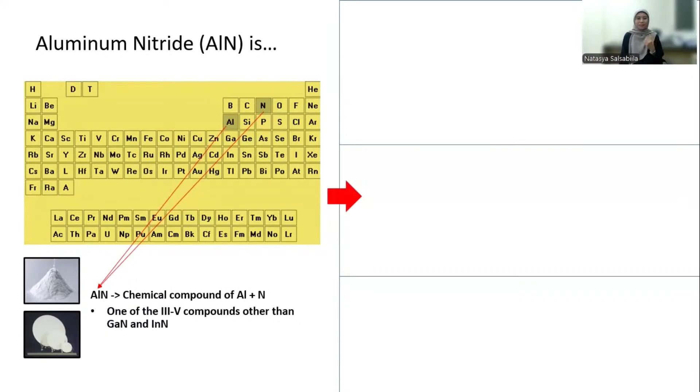You can see several real-world applications of this semiconductor material, such as in the high-frequency domain, in high-power systems, and most importantly, AlN can be found in devices which combine both high-frequency and high-power capabilities in one device. For that purpose, mostly AlN is produced on silicon wafers. Sounds very wonderful, right?

Now, let's talk about the current concern regarding AlN on silicon wafers. If we look at the current market, most companies such as Kyma Technologies, Enkris Semiconductor, Mitsubishi Chemical, Dowa, and others, they are still focusing on 2 until 6-inch wafer.

So there is a clear demand and opportunity to shift towards 8-inch wafer production, which supports next generation devices through lower costs, higher yields, and of course, contributes to industrial scale production. Because when we increase the wafer diameter, we can fabricate 25 to 40% more chips per wafer.

But it's not as easy as it sounds. Scaling up the wafer size introduces a major hidden challenge: achieving film uniformity across the large surface area so that the entire wafer can be utilized efficiently without material waste.

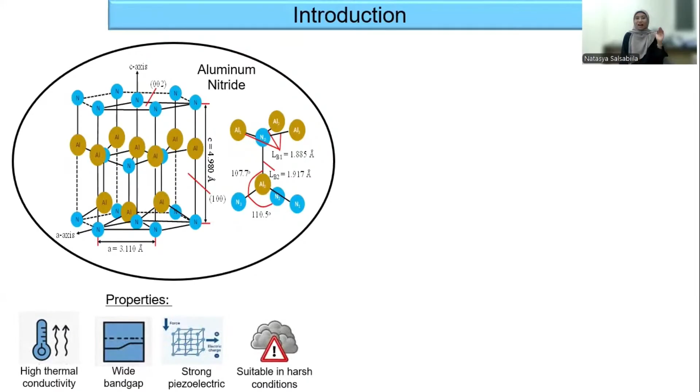So, what makes AlN sound very interesting? AlN has excellent properties, such as high thermal conductivity of around 320 watts per meter Kelvin, a wide bandgap of 6.2 electron volts, strong piezoelectric response, and excellent chemical and thermal stability.

Several methods can be used to synthesize or fabricate AlN, such as metal organic chemical vapor deposition or MOCVD. Then we have atomic layer deposition, or ALD. The next one is molecular beam epitaxy, or MBE, and the last one is pulse laser deposition, or PLD.

However, these methods are typically expensive, complex, and more suitable for small wafer sizes only. This is where magnetron sputtering comes in. This method offers a solution by providing better control and higher deposition rates.

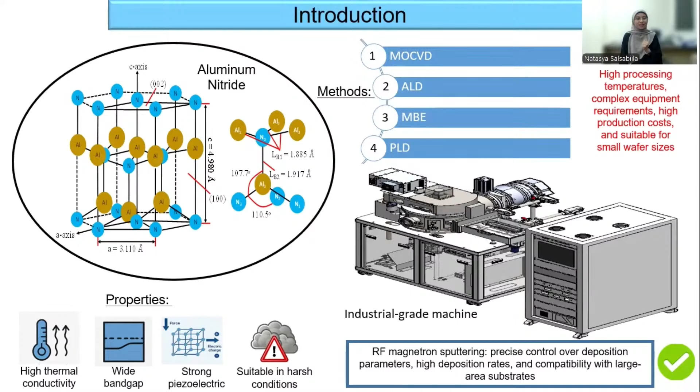However, most sputtering systems use only 3-inch targets, and the use of larger 12-inch systems is still very limited. So, in this lecture, I try to explore the AlN film growth using the 12-inch system, or industrial-grade machine, that supports large wafer size fabrication.

Then, how can we make sure that our AlN film has high uniformity? The answer is in the rotation speed setting that we use. This parameter sounds underrated, but believe me, this parameter is very strong in influencing the uniformity across the 8-inch wafer.

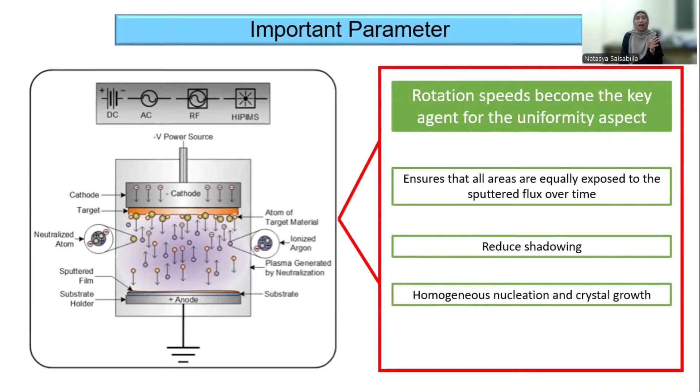This parameter can ensure that all of the wafer surface is equally exposed by the target and make the film have homogeneous nucleation and crystal growth.

For your additional information, this chamber is in vacuum condition with a pressure of 1 times 10 to the minus 7 torr. You can imagine that even a fly and an ant can die in this environment, because our normal atmospheric pressure is 760 torr, not even minus.

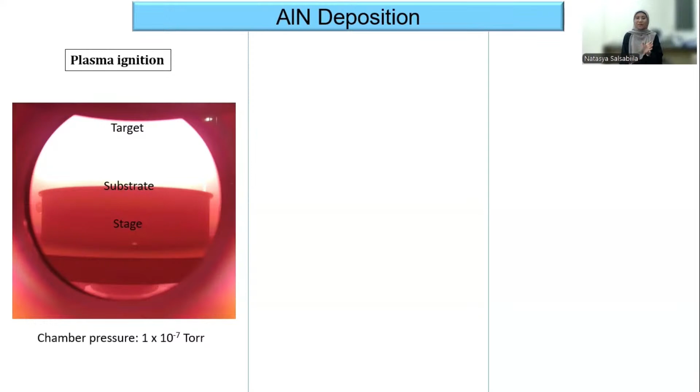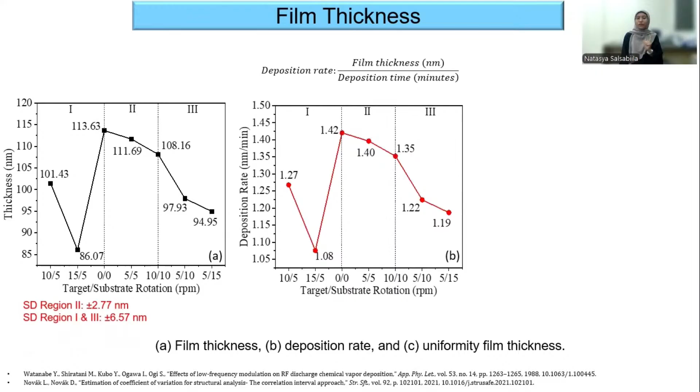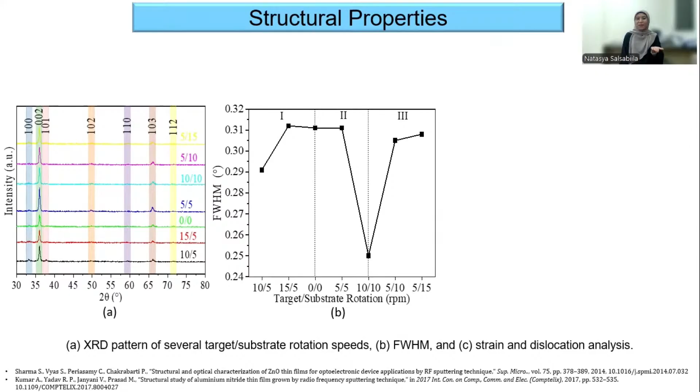Moving to the XRD result, figure A shows the strongest 002 peak at 5 per 5 RPM, indicating strong c-axis orientation. However, the 10 per 10 RPM setting, while not having the strongest peak, shows the lowest FWHM, strain, and dislocation density. Lower FWHM, strain, and dislocation density indicates better crystal quality and lower lattice distortion. Therefore, we conclude that 10 per 10 RPM offers the best overall crystalline quality.

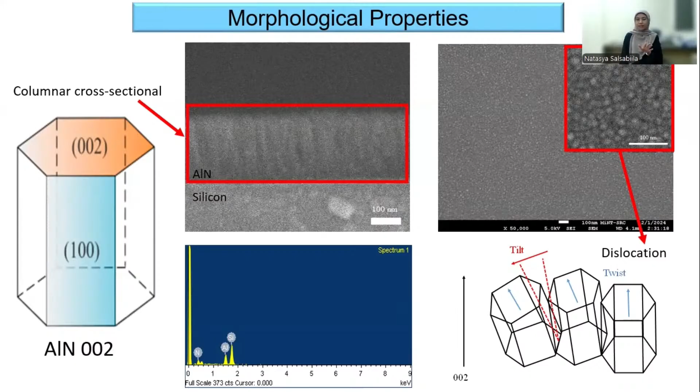Okay, we already know about the properties of AlN with varying rotation speeds, and we know that the best rotation setting is achieved using 10 RPM for both target and substrate rotation speed. Then what's next? Of course, we need to study the uniformity across the entire wafer, right?

First, we will see from the 2-inch wafer, from the film thickness, surface roughness, crystalline quality, and also electrical properties, it shows a consistent result across a 2-inch area.

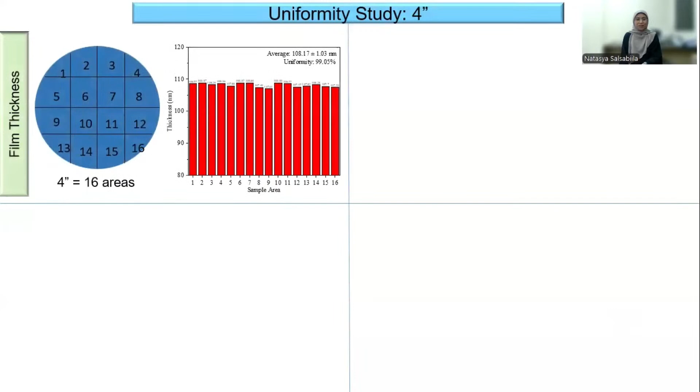Okay, we tried to make a larger area, which is the 4-inch wafer. This result also shows that the properties of the AlN film remain consistent, but small fluctuations start to appear.

The final observation, of course, is on the 8-inch wafer. This shows that the properties are still consistent, but some area on the edge of the wafer has a lower quality compared to the center area. But we can still use more than 85% of the wafer for the next device fabrication.

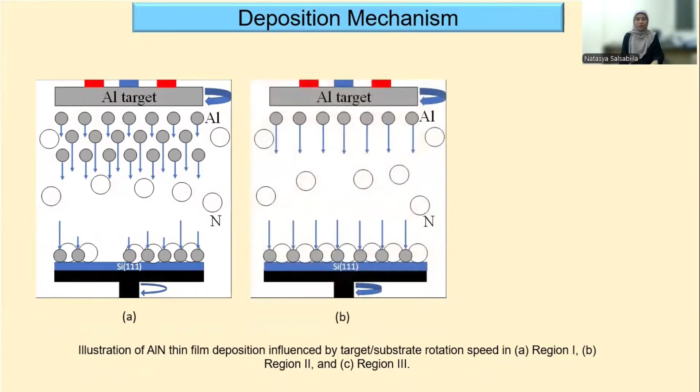Then, if you are still curious about what exactly happened behind the plasma ignition process, especially when we vary the rotation speeds, this figure can give you illustrations of the atom flux in the chamber. You can see here that the best condition is in region 2, where the rotation is balanced between target and substrate, resulting in better film uniformity and crystal quality.

Now, we are almost finished. So, to summarize all of this talk, the 10 per 10 RPM rotation setting produces the most uniform and highest quality AlN film. Then, the uniformity study shows that the AlN film has consistent film properties across the wafer, and it's very promising to proceed with further device fabrication.

This is an example of the AlN film on the 8-inch silicon wafer with a customized thickness that our collaboration partner usually requests for their device fabrication, such as for high electron mobility transistors, or HEMT, or even for thermal management device applications. Related to technology readiness, this AlN thin film achieves TRL5 and contributes to the Sustainable Development Goals number 9 and 12.

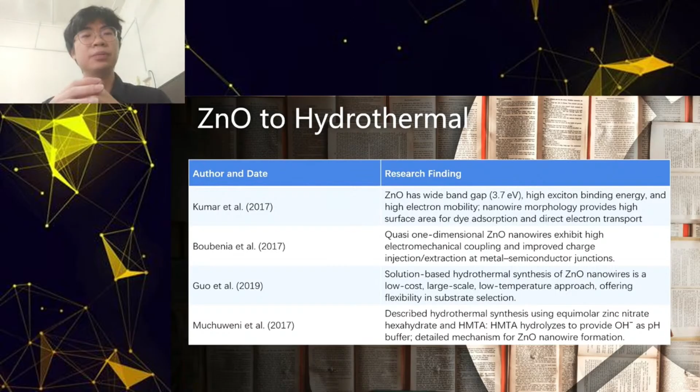Other parameters like sputtering parameters I will briefly explain during the methodology part, and proceed to the third part, methodology.

After that, post-annealing will be done at 350 degrees in air for 1 hour to improve the crystallinity. Next, hydrothermal growth will be done by mixing hexamethylenetetramine with zinc nitrate hexahydrate for equimolar concentration of 0.025 mole, balancing the dye loading with efficiency of charge transport.

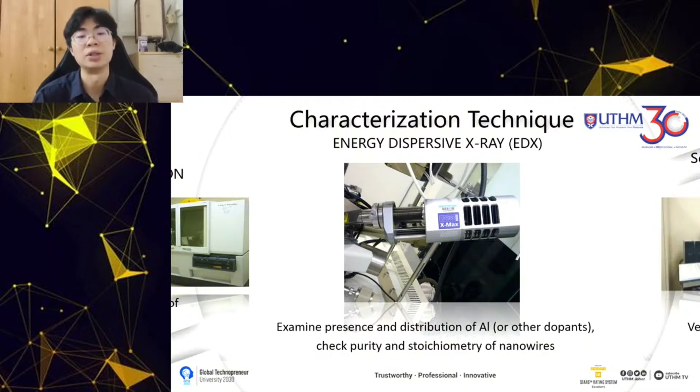Next is the energy dispersive X-ray (EDX), which is used to examine presence and distribution of aluminium or other dopants and check purity and stoichiometry of the nanowire.

Next is the XRD diffraction, which is used to confirm the zinc oxide nanostructure, C-axis alignment, and effect of doping on crystal quality.

Next is the UV-Vis, or ultraviolet visible spectroscopy, which is used to record transmittance percentage across the visible wavelength. Lastly is the 4-point probe, which is used to calculate the zinc oxide resistivity, and after that we can use it to calculate the figure of merit for the zinc oxide nanowire thin film.

Next, chapter 4, expected results. As you can see, a dense forest of vertically aligned nanowires on the seed layer with a diameter of 50 to 100 nanometers, uniform spacing, and this cross-section view shows perpendicular growth and consistent alignment. Here's a more detailed view, as you can see.

Okay, next for the XRD analysis. As you can see, sharp zinc oxide peaks with dominant 002 reflection near 2-theta 34 degrees, with a slight shift for the doped sample. It's predicted that from 0.9 to 1.2 atomic percentage, the shift will be very slight to observe.

Next for the EDX analysis, as you can see, clear zinc K-alpha and oxygen K-alpha peaks, where the aluminium also has a K-alpha peak corresponding to the target, for 0.9 atomic percentage.

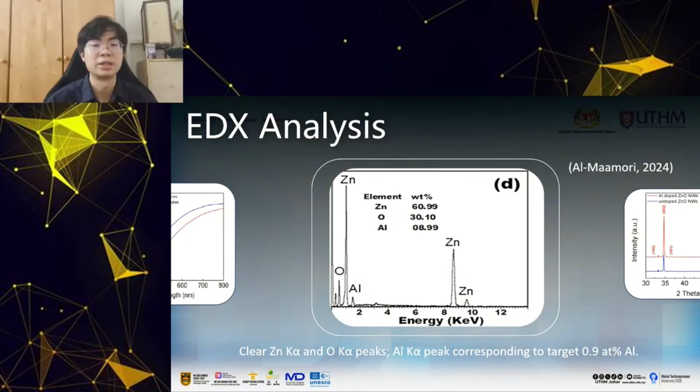Lastly is the 4-point probe analysis, which is used to examine the resistivity of the zinc oxide nanowire, and will be plotted into a figure of merit, which is used to balance between the resistance and the transmittance of the substance.

And this is the sum of the references I've used in my title.

As a conclusion, this presentation outlines a comprehensive plan to develop and characterize vertically aligned aluminium-doped zinc oxide nanowires for use as transparent conductive photoanodes in a dye-sensitized solar cell.

By combining RF sputtering of a zinc oxide seed layer with low temperature hydrothermal growth and precise tuning of aluminium doping between 0.9 to 1.2 atomic percentage, this study will establish a reproducible synthesis protocol for high-quality zinc oxide nanowires with controlled morphology and alignment.

I will correlate the doping levels with structural (XRD), compositional (EDX), optical (UV-Vis), and electrical (4-point probe) properties, and identify the optimum aluminium concentration, predicted around 1.0 to 1.1%, that maximizes the transparency-conductivity trade-off as quantified by a peak figure of merit.

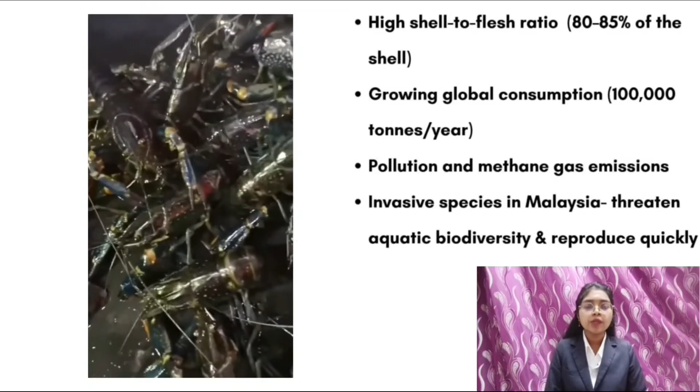Crayfish, specifically Cherax quadricarinatus, are freshwater crustaceans with a high shell-to-flesh ratio, which is about 80 to 85% of their body being shell. Globally, more than 100,000 tons of crayfish are consumed each year. In Malaysia, this species has been characterized as invasive due to its rapid reproduction and potential to disrupt local aquatic biodiversity.

Improper disposal of their shells contributes to waste buildup, pollution, and methane gas emissions. During my visit to a site in Parit Sulong, Johor, I observed how fast they can breed and how they must be frequently caught. While some are consumed, most of their shells are discarded. And that's where I saw an opportunity.

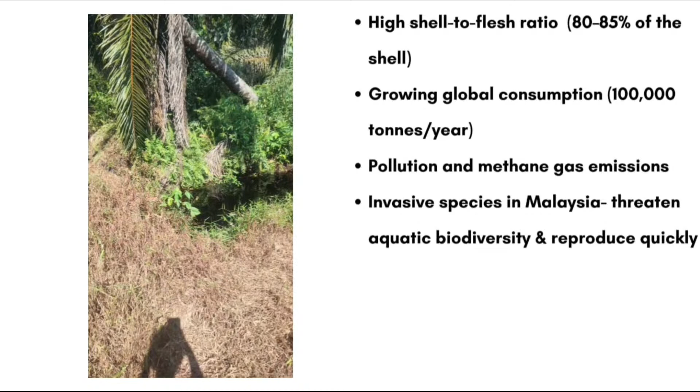The poor management of crayfish waste leads to environmental issues. The shells are often discarded without proper treatment, attracting pests, releasing unpleasant odors, and emitting methane as they decompose. This research aims to address both waste from invasive species and environmental pollution by converting discarded shells into reusable material.

This research is guided by the following objectives. Number one, to calcine crayfish shells at 550, 600, 700, and 900 Celsius. To characterize raw and calcined crayfish shells, and to analyze the microstructure of raw and calcined crayfish shells.

Crayfish shells are primarily composed of chitin around 20 to 30%, protein 20 to 30%, and calcium carbonate around 30 to 40% of the shell.

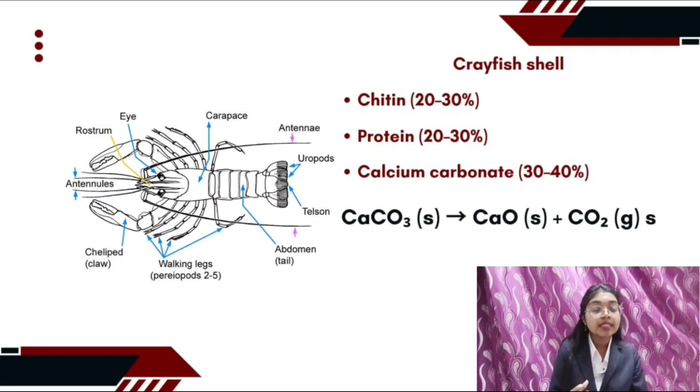These biocomponents are valuable, particularly the calcium carbonate, which through calcination decomposes into calcium oxide and releases carbon dioxide. Calcium oxide is a highly reactive compound with strong basic properties, making it valuable in neutralizing acidic waste and capturing heavy metals in contaminated water.

To investigate this potential, the research involved a few steps: collecting crayfish shells from a local source, then cleaning and drying them at 90 Celsius for 24 hours in the oven. After that, grind them into a fine powder and sieve through a 63 micrometer mesh. Then calcine the powder at 550, 600, 700 and 900 Celsius using a muffle furnace. Finally, characterize the raw, 550 Celsius and 600 Celsius samples using XRD, FTIR and SEM.

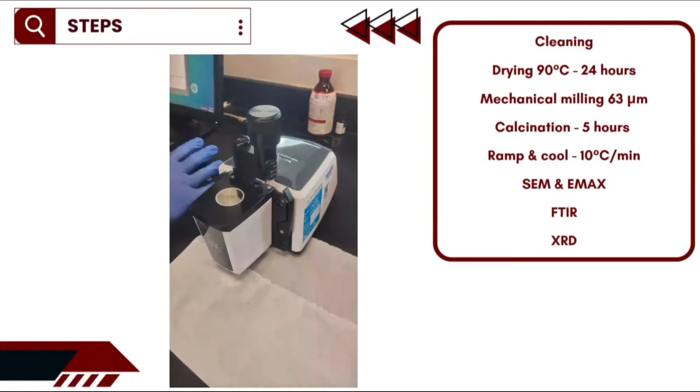The SEM image of raw crayfish shell powder shows a compact and layered surface structure. SEM EDX also confirmed the presence of key elements like calcium, carbon, and phosphorus. This initial structure serves as a reference to observe how morphology changes after calcination.

XRD patterns indicate the beginning of calcium oxide formation at 550 Celsius. At 600 Celsius, calcium oxide peaks become more pronounced, confirming partial decomposition of calcium carbonate. Further improvements and complete conversion are expected at 700 Celsius and 900 Celsius, which are planned for future analysis.

FTIR spectra revealed strong carbonate bands in raw samples, which began to diminish at 550 Celsius and further decrease at 600 Celsius. New oxide-related functional groups began to appear at 600 Celsius, confirming the onset of calcium carbonate decomposition.

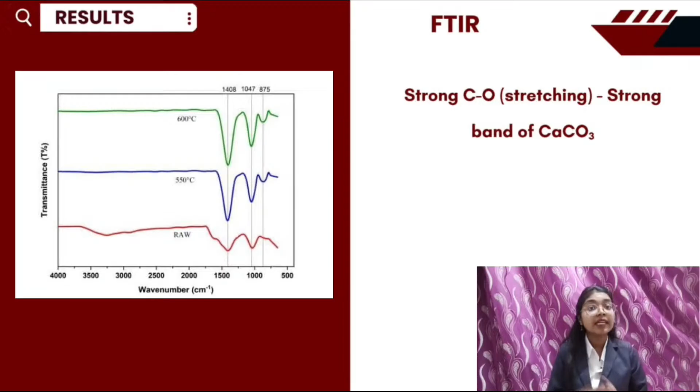At 550 Celsius, the powder turned dark grey due to the presence of residual carbon. At 600 Celsius, the color lightened, indicating organic matter burned off. These changes visually support the findings from XRD and FTIR.

Why is this important? Calcium oxide derived from crayfish shells can be applied to remove heavy metals from wastewater. When calcium oxide is added to water, it forms calcium hydroxide, which increases the pH and promotes the precipitation of heavy metal ions like lead, cadmium, and copper. These ions bind to hydroxide groups or settle out as insoluble metal hydroxides, effectively removing them from the water column.

This research is not only about chemical conversion, it contributes to broader goals: first, waste reduction and management; development of cost-effective environmental solutions; and then reduction in water contamination, turning invasive species waste into a sustainable resource.

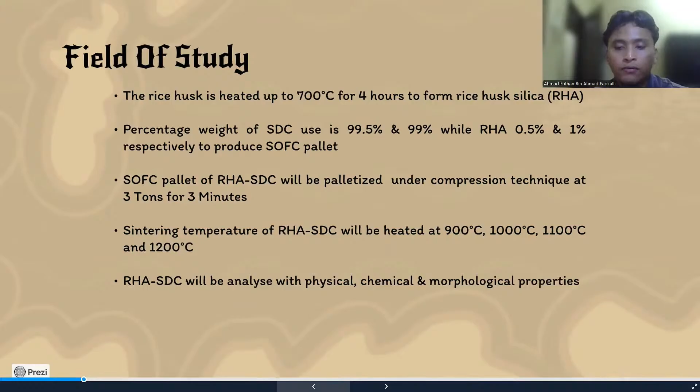Let's dive into the literature review. Imagine a device that generates electricity without burning fuel, no smoke, no pollution, just clean energy. That's the magic of solid oxide fuel cell. SOFC is a high-tech electricity generator.

It uses hydrogen or natural gas. Instead of burning them, it creates electricity through a chemical reaction that induces electrons, making it super efficient and eco-friendly energy. It's like a battery that never dies as long as you keep feeding it fuel and air. Inside every SOFC there are 3 layers: anode, where fuel goes in; cathode, where oxygen comes in; and electrolyte, the medium to conduct oxygen ions to create induced electrons.

Now, what is SDC and how is it used in SOFC? If SOFC is the future of clean energy, then SDC is the secret sauce that makes it work better and cheaper. SDC is a next-gen electrolyte that works at lower temperatures, around 500 to 700 Celsius.

In my project, I'm making SDC even better by adding rice husk silica to cut those temperatures further. Lower temperatures aren't just convenient, they are triple wins: first, less material degradation; second, cheaper heating costs; and third, faster startup times, with no need to wait for temperature rise at extreme heat.

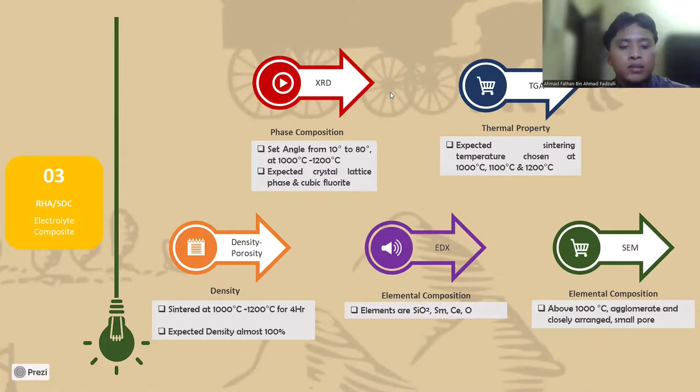After sintering for 4 hours, we measure density via image processing. Our target density has a tolerance of plus minus 5 to 6%.

For methodology, for RHA to become a sintering aid, it needs a transformation. RHA is burned at 700 Celsius for 4 hours at a heating rate of 5 Celsius per minute using a furnace.

Why did we choose 700 Celsius? Because based on previous studies, at this temperature the silica content is in an amorphous state, so it has high purity. This step converts rice husk ash into high purity amorphous silica, which is the active element needed to enhance SDC sintering. Calcination also burns off moisture and organic contaminants, leaving behind pure functional silica.

For the same process, we use a planetary mill with a ratio of 20 grams of electrolyte to 20 pieces of zirconia balls. In the grinding jar, we set 200 rpm for 3 hours duration.

It's long enough to achieve a fine and uniform powder. We're afraid that if it's more than 3 hours, the grinding jar will overheat the materials and affect their properties. At 200 rpm, it's enough for the zirconia balls to strike a balance between fracture energy and avoiding agglomeration forming in the electrolyte.

Okay, next we move to sieving. First, the electrolyte is crushed finer using an agate mortar. Why agate? Because it's hard and chemically inert, so it won't contaminate our sample.

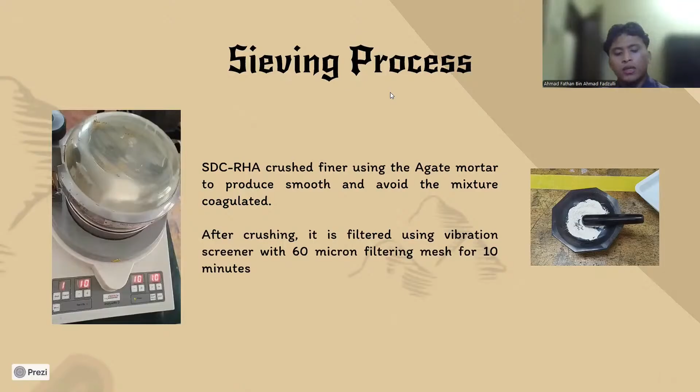Next, we pass the powder through a 60 micron mesh using a vibration screener for 10 minutes. This filters out larger particles more than 60 microns, ensuring only the finest particles are left.

Let's go to pelletizing. The SDC RHA is pelletized into cylindrical pellets, with an average weight of about 0.5 gram, 1 millimeter thick, and 13 millimeters in diameter. The samples are pressed uniaxially under 3 tons for about 3 minutes.

The process is monitored from start to end with a degradation curve. The sample is then placed in the furnace at 900, 1000, 1100, and 1200 Celsius for 4 hours, with a heating rate of 5 Celsius per minute. This is the sintering profile, as you can see, because we need to determine at what time and cycle.

Next, we go to results and discussion. For TGA, the data reveals a clear pattern: higher temperature causes greater weight loss in SDC RHA, while testing stopped at 1400 Celsius due to equipment limits. The critical degradation window from 900 to 1200 Celsius is fully monitored.

Why does this happen? At high heat, ceria-based materials undergo phase transitions that distort the crystal structure, leading to mass loss, and this change also leads to increasing porosity. Here's where silica from RHA becomes a game changer: it stabilizes the structure, modifies crystallinity, potentially lowers the optimal sintering temperature, reduces oxygen loss, and preserves ionic conductivity.

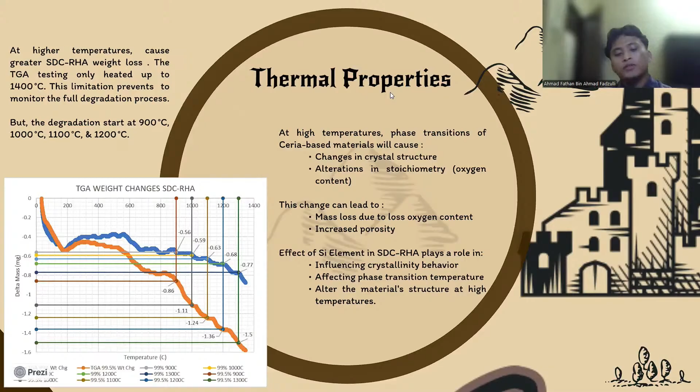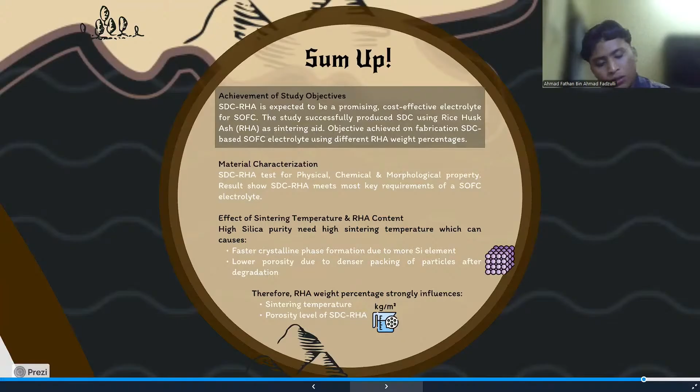For further recommendation, higher silica purity improves porosity and surface crystallography. To increase silica content, raise the percentage of RHA to produce more crystallized silica with SDC.

For the pelletizing problem, the SDC-RHA mixture becomes brittle after being pelletized into silicate tablets. With PEG solution, the gel-like structure causes SDC-RHA to stick inside the mold cavity. There is an alternative binder such as glycerol instead of using PEG. Glycerol acts as a humectant, which retains moisture to prevent brittleness, acts as a lubricant to reduce mold sticking, and is cost effective, as glycerol is an organic solvent. That's all from me, thank you.

Thank you very much for your presentation. This is good and technical, very nice. So actually what you want to do is reduce, or use a sintering aid for the SDC, is that correct? So you use this rice husk, and you want to replace something, isn't it?

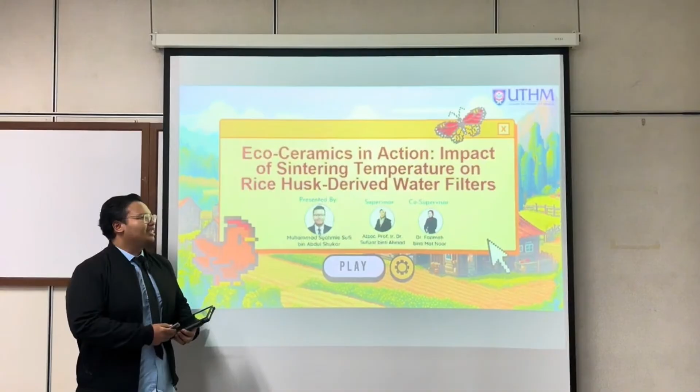For today's presentation, first we will take a look at the introduction for this research study, then the literature review, methodology, results and discussion, and last but not least, the conclusion for this research study.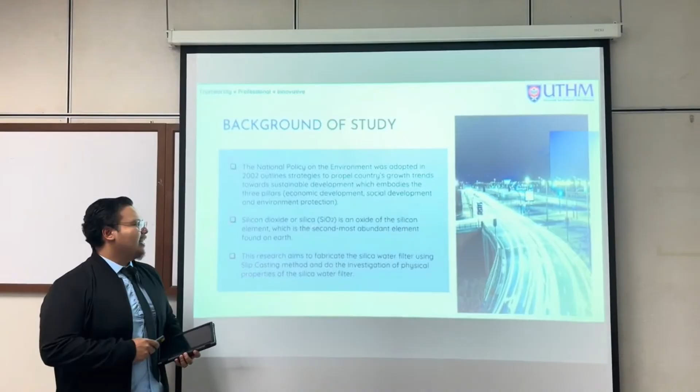First, we take a look at the background of study. The national policy on the environment was adopted in 2002, outlining strategies to propel the country's growth trends towards sustainable development. Silica, also known as silicon dioxide, is an oxide of the silicon element, the second most abundant element found on Earth. This research aims to fabricate silica water filters using the slip casting method, and then investigate the physical properties of the silica water filter.

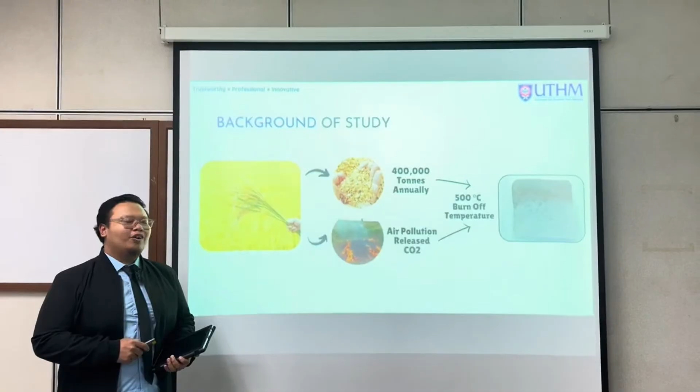As we know, 400,000 tons annually of rice husk waste product are thrown away or burned by traditional farmers. We also know that if paddy rice husk waste product is burned in open air, it will cause the release of carbon dioxide. So to control these problems, we will burn the rice husk waste product at 500 degrees Celsius of burn-off temperature to produce amorphous silica.

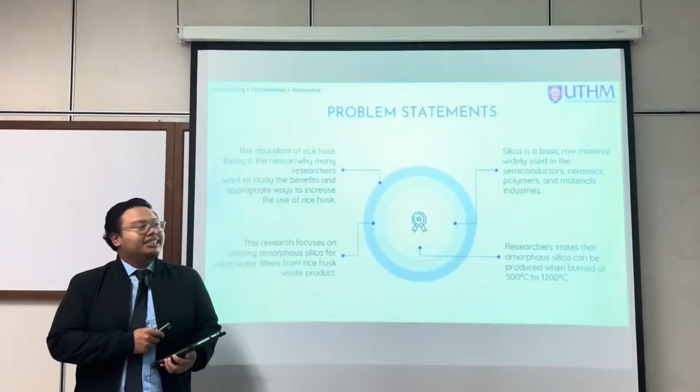For the problem statements of this research study: the abundance of rice husk today is the reason why many researchers want to study the benefits and appropriate ways to reduce waste produced by paddy agriculture. Secondly, this research focuses on utilizing amorphous silica for silica water filters from rice husk waste product.

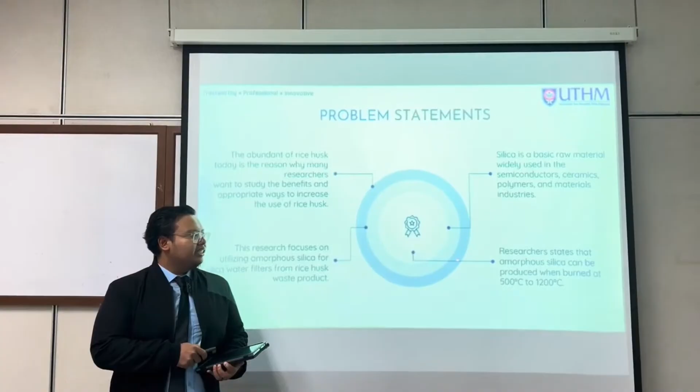Thirdly, silica is a basic raw material widely used in semiconductors, ceramics, polymers, and material industries. Researchers also state that amorphous silica can be produced when burned at 500 to 700 degrees Celsius, while crystalline silica is burned at 700 degrees Celsius until 1200 degrees Celsius.

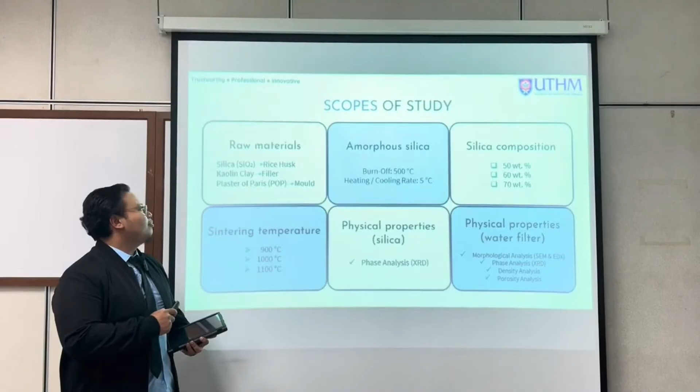As stated earlier, these are the scope of study for this research. The silica gathered for this study will be from rice husk waste product, and for the filler we will use kaolin clay. For the mold fabrication, we will use plaster of Paris, which is POP.

These are the scope for the amorphous silica, which will be burned off at 500 degrees Celsius with a heating and cooling rate of 5 degrees Celsius. For the silica composition, we will take 50, 60, and 70% of the silica. For the sintering temperature, we will take 900, 1000, and 1100 degrees Celsius.

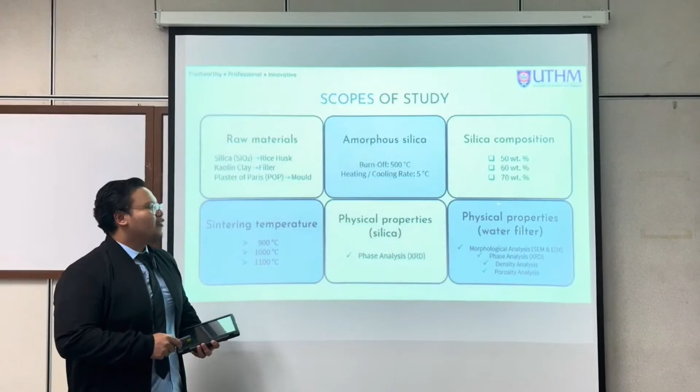For the physical properties of the silica, we will use phase analysis, which is X-ray diffraction (XRD). For the silica water filter, the physical properties studied will be morphological analysis using scanning electron microscopy and energy dispersive X-ray, phase analysis using XRD, and density and porosity analysis of the fabricated silica water filter.

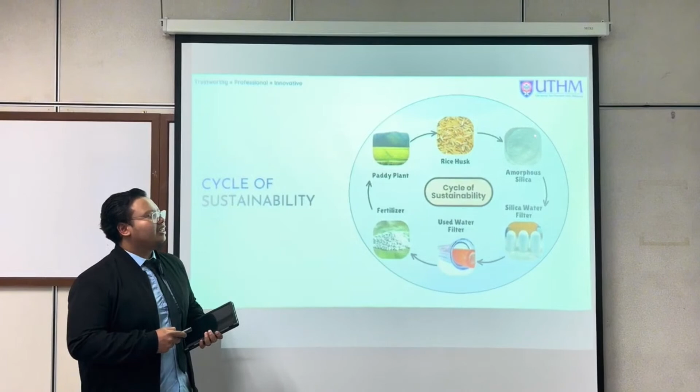Next we will look at the literature review for this research study. First, this is the cycle of sustainability for this research, where we gather the rice husk waste product from Pasir Tumboh, Kelantan, and produce the amorphous silica used for fabricating the silica water filter. The used water filter will then be crushed to produce fertilizer.

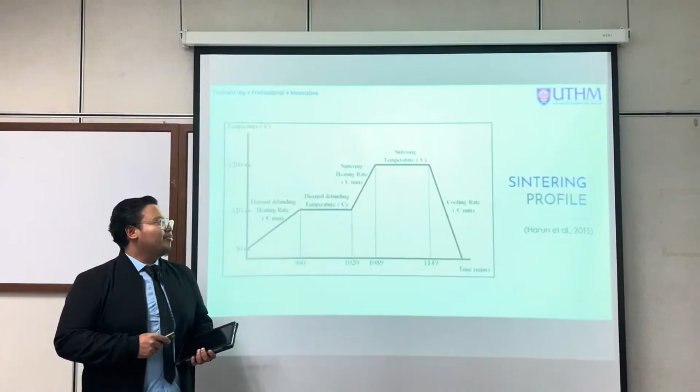From Harun et al. 2013, it states the suitable sintering temperature, which is the two stages of sintering temperature for producing the amorphous silica water filter.

We will then do again the slip casting method. If there is no defect from the fabricated silica water filter, we will get the physical properties of the silica water filter, and then we will characterize the developed silica water filter.

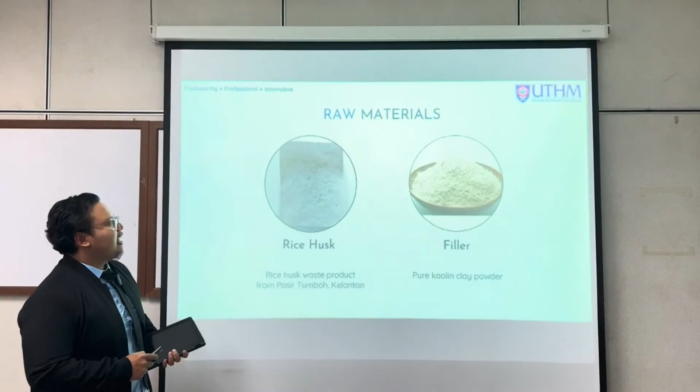These are the raw materials that we will use for this research study. First, the amorphous silica gathered from Pasir Tumboh, Kelantan, and then this is the kaolin clay that will act as filler for this research study.

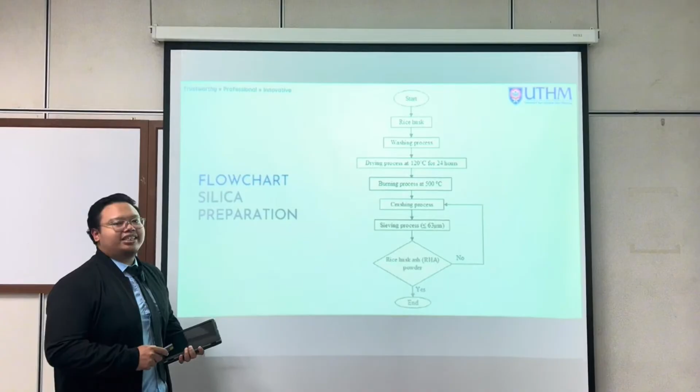These are the flowchart for the silica preparation. First, from the rice husk waste product, we will dry it at 120 degrees Celsius for 24 hours, then burn the rice husk waste product at 500 degrees Celsius. Next is the crushing process for the fabricated amorphous silica, followed by sieving until 63 micrometer.

From the XRD analysis, if the rice husk waste product has confirmed amorphous structure, we will use the amorphous silica for fabricating the silica water filter.

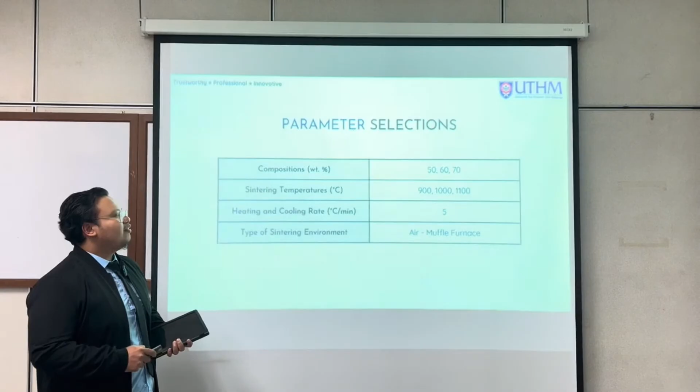As stated earlier, these are the compositions that will be used for this research. For the sintering temperature, we will use 900, 1000, and 1100 degrees Celsius, and the heating and cooling rate for this research is 5 degrees Celsius per minute.

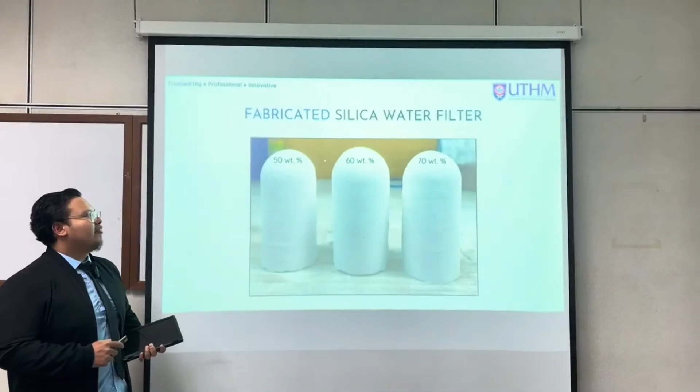These are examples of the fabricated silica water filters, consisting of 50 weight percent of silica, 60 weight percent of silica, and 70 weight percent of silica. For this research, the two-stage sintering profile will be used to produce the fabricated silica water filter.

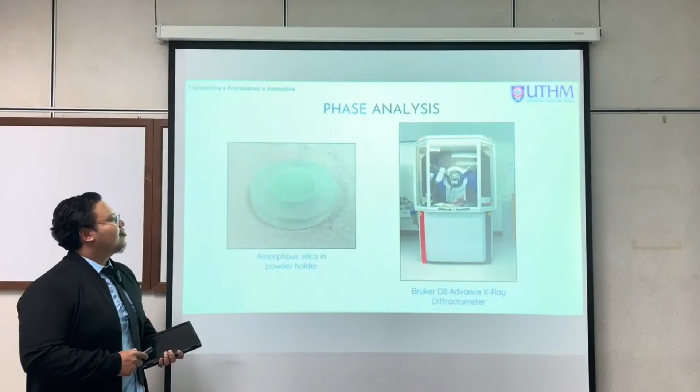For the morphological analysis, we will use the SEM Hitachi SU1510 model, along with an auto-fine coater to remove electrons for the SEM method. These are the Bruker D8 Advance X-ray diffractometer used for the phase analysis, XRD.

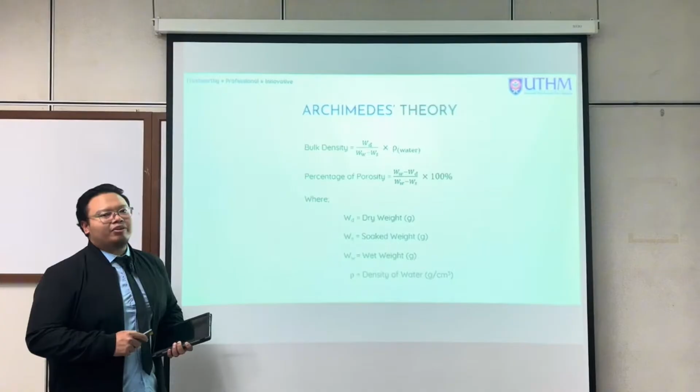For Archimedes' theory in this research, we will use the XS64 Mettler-Toledo electronic balance to obtain this formula, which is the formula for bulk density analysis, and this is the percentage of porosity analysis for the fabricated silica water filters, where WD is dry weight, WS is soaked weight, WW is wet weight, and this symbol represents the density of water.

Next, we will take a look at the result and discussion for this research study. Firstly, we will take a look at the list of testing and analysis for this research study.

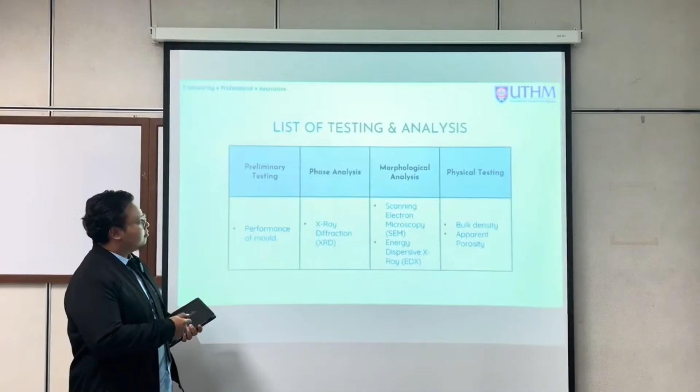For preliminary testing, which is the performance of mold, we use synthetic silica in the working mold, as shown in this figure. These are the fabricated green body of the silica water filter.

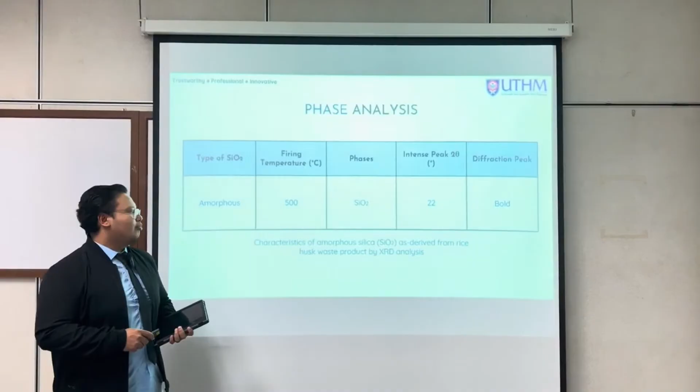For phase analysis of amorphous silica, we can see the amorphous halo for the amorphous silica produced at 500 degrees Celsius. These are the tables for characteristics of amorphous silica derived from rice husk waste product by XRD analysis.

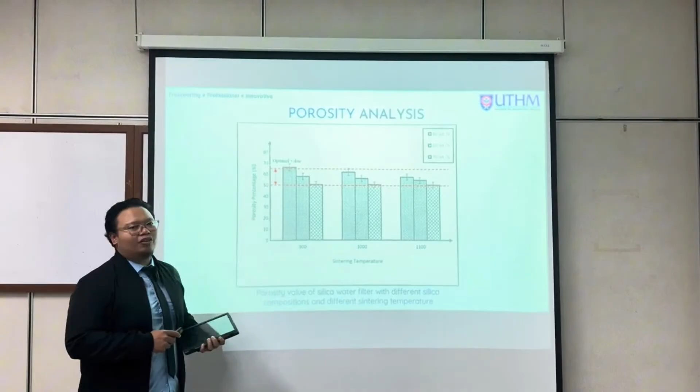For porosity analysis, we can see that 50 weight percent of silica from 900 degrees Celsius temperature have exceeded the optimal value for this fabricated silica water filter, which is the optimal porosity value ranging from 50 until 65%.

For morphological analysis, which is SEM (scanning electron microscopy), we can see that all samples contain silica, and with lower weight percent of silica, more pore size and more pores are produced.

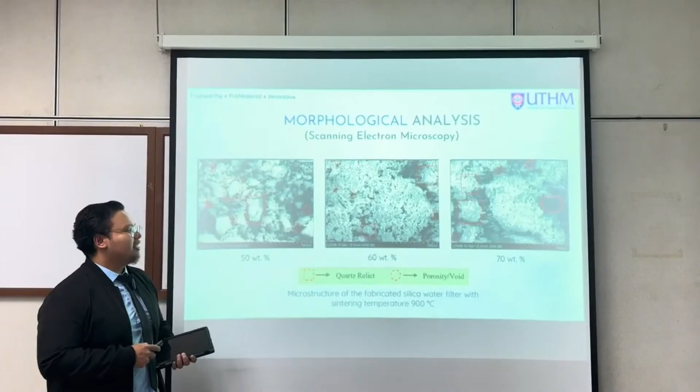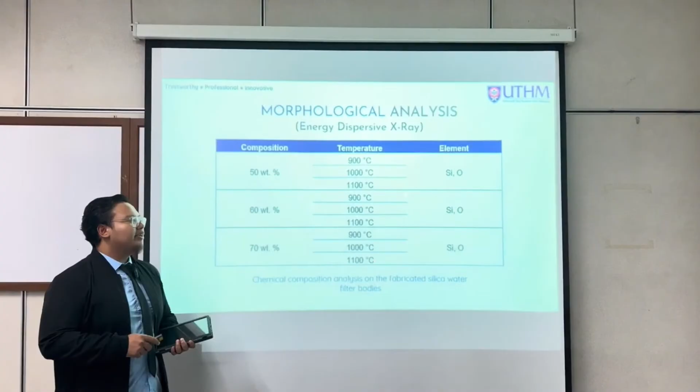Continuing for morphological analysis, we use EDX analysis, which is energy dispersive X-ray. From this table, we can see that all samples have gathered the elements silica and oxygen, which is why we know silica is silicon dioxide.

For the conclusion of this research study, amorphous silica was successfully produced by burning rice husk at the temperature of 500 degrees Celsius.

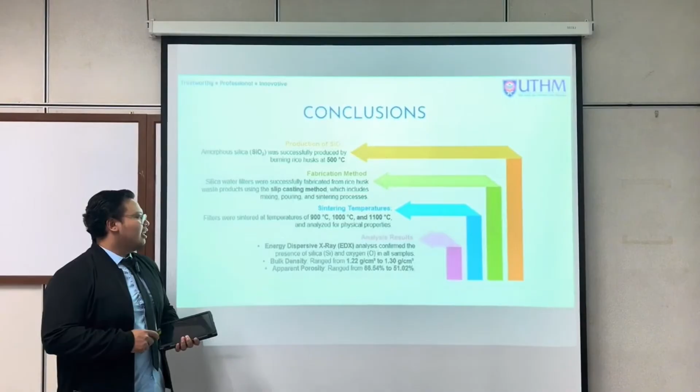Secondly, the slip casting method has successfully fabricated the silica water filter, which includes the mixing, pouring, and sintering process. Next, the analysis results confirmed that the EDX analysis showed the presence of silica and oxygen in all samples.

For the bulk density, all samples have been produced and gathered for the range from 1.22 gram per centimeter cubic to 1.3 gram per centimeter cubic. For apparent porosity, all samples have been gathered for the range of 68.54% to 51.02%.